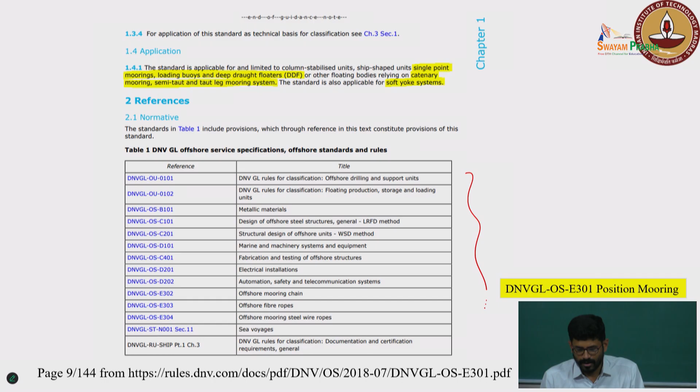This is about the mooring design, but it doesn't end there. When you start a design, you have to analyze, and you have to make changes to your design, so it's an iterative process. The different mooring analyses exist: quasi-static, frequency domain, time domain. This is what the industry practices.

Again, in this time domain we have the decoupled analysis and the coupled analysis. But before we get into time domain, it is important to understand the quasi-static analysis, because that is the very first step.

When you have a floating structure, you put your moorings in place. Quasi-static, the word itself clearly says it is not disturbed much. Your floating structure moves very slowly such that the line dynamics are not affected. Basically this point moves along with your floating body. If the floating structure is going to move, that point is also going to move along with it, so it will create some kind of a whipping action.

In reality it will create some kind of whipping action, but if your floating structure is not responding quickly to the environment and is going to move slowly, then a quasi-static analysis can be done. That is the very first step, and then you can go on to do the time domain analysis. The industry practice is the time domain analysis with the decoupled approach.

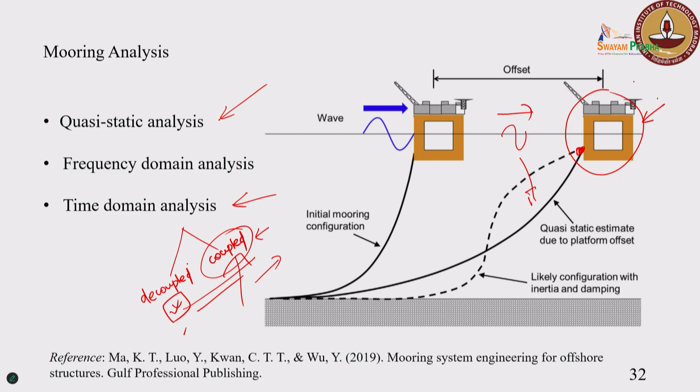Now the basic data input is that you need to know the type of floater you are going to deal with. In this particular case we have the WEC characteristics, the type, and dimensions. The floater motions will give the loading to the fairlead of your mooring line, and that is what is going to travel to your line. So this includes WEC characteristics and environmental loads: wind, wave, current, water depth, soil characteristics, and operational requirements.

Sometimes, as said, for your drilling operations you want to have very little excursion, because you go exactly to the site where your floater is, to that particular location. For example, if this is the site and this is the place where you want to drill, you take your semi-submersible exactly above the place where you want to create the well. Then you have a restriction on how much this floater can move around.

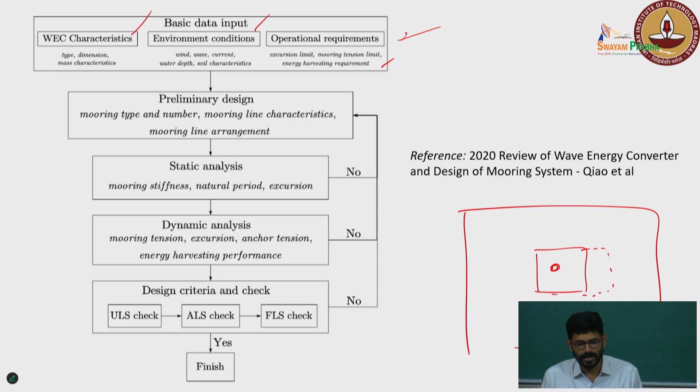So we have some constraints, and such constraints have to be taken into consideration. This includes the excursion limit, and then the preliminary design, basically selecting the mooring type and number, the mooring line characteristics, and the mooring line arrangement.

So how it has to be connected to your floating vessel and where it has to end. We start with the static analysis, then move on to the dynamic analysis, then the design criteria. This is not complete, so it's an iterative activity. If it satisfies the criteria, go to the next step, or else you change it. That's what we mean.

The static analysis is basically to have a good understanding of what the fairlead tension is without any loads or other things. You just have a floating structure, you connect your lines to the structure, and see what is happening around it.

Dynamic analysis is when you subject your floater to respond to the waves, and because of the response of the floater, how that response is transferred to your mooring line.

Then we move on to check the design, because all items have a limitation, like the breaking load limit. When you purchase something from a shop, you know not to apply more than a certain load or it will fail. The same applies to mooring lines. By doing all this analysis, we're trying to check whether it's within the limit, whether the item will sustain, whether it will be safe for the 20 to 25 year service life.

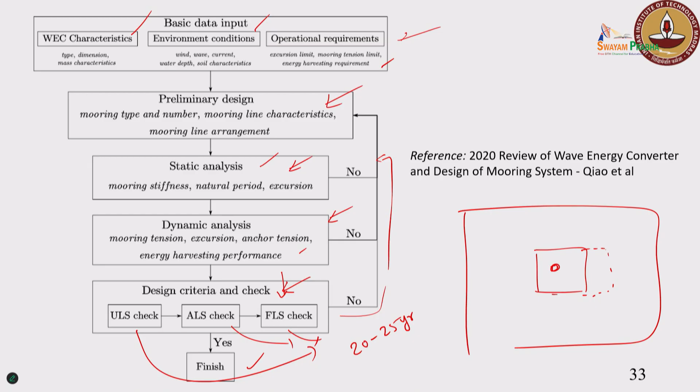Did they consider the temperature gradient from the water surface? No, they don't worry about that. These are all rugged structures - the chain, wire rope - the temperature gradient will not have any impact on the overall performance of the mooring.

Generally, how much does it cost? I'm not aware of the exact cost, but it's huge in numbers, especially for offshore mooring lines, because it has to withstand the corrosive environment. So it's not just normal steel, it's galvanized steel. All these things add up as an add-on to your existing items, so it becomes very costly.

Yes Prof, I could give you some numbers. Some literature said mooring costs 40% of wave energy converters. In 2019 I visited Hawaii, there's a wave energy test site, and some mooring had failed. They were in the process of repairing and rebuilding it. The water depth wasn't that deep, from 30 to 80 meters, I don't know which one failed, but it took them $2 million US dollars. So that gives you a sense of how much it costs.

Also, for something like an FPSO, is the amount spent on mooring worth it, since the FPSO itself is a huge cost and the mooring lines would be relatively less? It depends - for a point absorber, which is small, the mooring itself could be a much larger cost proportionally. It's similar to how for a courier, the product value may be very low but the courier cost itself is very high. The same way for many offshore items, the mooring cost can be around 50% or close to that of the overall cost.

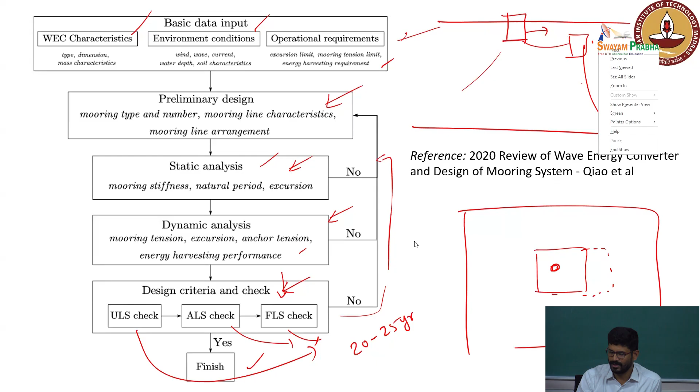So regarding direction, that's a very generic question. For a given site, first thing is you will get a rose diagram - you might have seen the rose diagram. What do you understand basically - in which direction, what is the most probable wave height and what is the occurrence of that, all those things you will get. So based on that, things will be aligned. So there is no direct straight answer, all these things are site dependent activities.

So you need to have extra data - meteorological data, which also includes these items. Based on that, they orient in such a way that it will take these considerations into account.

What is the general span of mooring, how much lifetime? Whenever you have this, that is why we have this fatigue limit state. So when we say fatigue, you carry out the fatigue analysis - basically, fatigue limit state means you are going to do a fatigue analysis.

One is, I am going to stretch it to the extent of what is the load that it will take to failure - that is extreme analysis. The other is fatigue analysis - basically you are going to apply cyclic loading for 20 years, or sometimes it's going to be very cyclic in nature.

For fatigue life of the subsea flexibles or something, the factor of safety has to be 10. Which means that if your service life is 20 to 25 years, minimum 250 years your fatigue life should turn out. When you carry out the analysis, if your fatigue life is more than 250 years, that is a pass. If it is less than that, you need to go again and change it. So you carry out the fatigue analysis primarily to find out what is the damage, and then coming back to the fatigue life only.

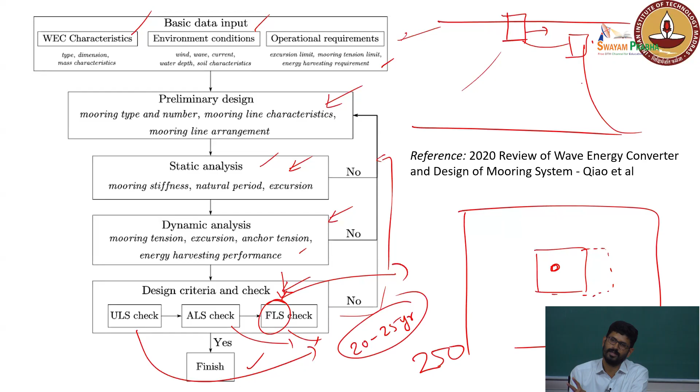Is there any specific diameter or something depending on the floater size, or how do you decide? That depends on the excursion only. Your watch circle basically says what is the excursion, how much it can happen. For example, in case of drilling, you don't want it to go beyond a particular distance, because that will have an impact on the drilling riser that you have. So there are no straight answers - it depends on depth, it varies for the floaters.

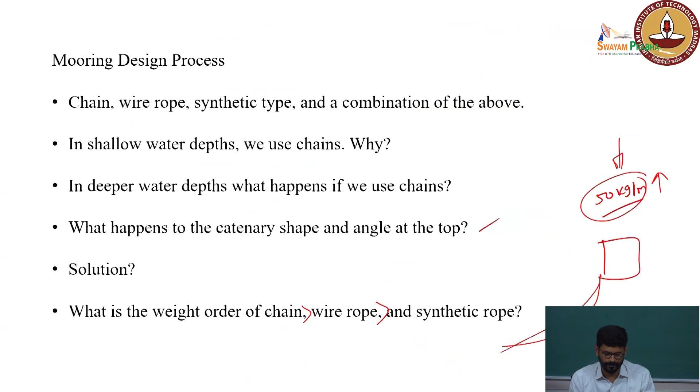The anchor circle will definitely vary, we saw that. So this is how it is - in case of shallow waters, the anchor radius to depth ratio will be a higher number, whereas in case of deeper water, it is equivalent to 1. So this is for your anchor circle.

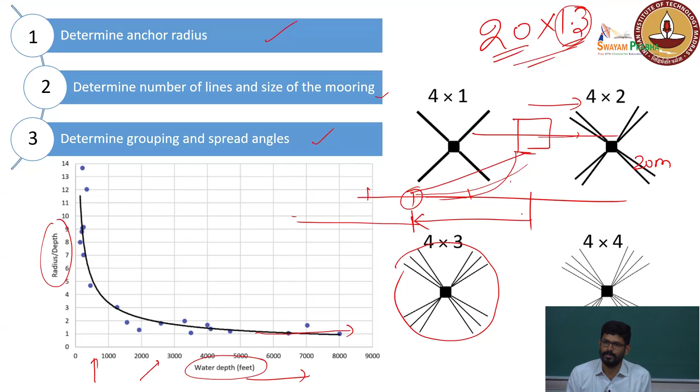For watch circle, you can tune it. For example, if I increase the pretension value, then your excursion will also get limited, correct? So all these things are a trade-off between the items. If your pretension increases, the line length on the seabed will come down, which means that on end B, the anchor point, there will be some loading coming up now.

If you have very few meters on the seabed, let's take 300 or 400 meters, then that load will not be transferred to the anchor. So it is always safe, because when your floater moves, that much chain has to be lifted up - that will act down and give the restoring force for your floater. When your floater excurses, it has to lift the mooring line, and since it is lifted, it is in suspension now. So the self weight will try to act down, and that will bring back your floater to the initial point.

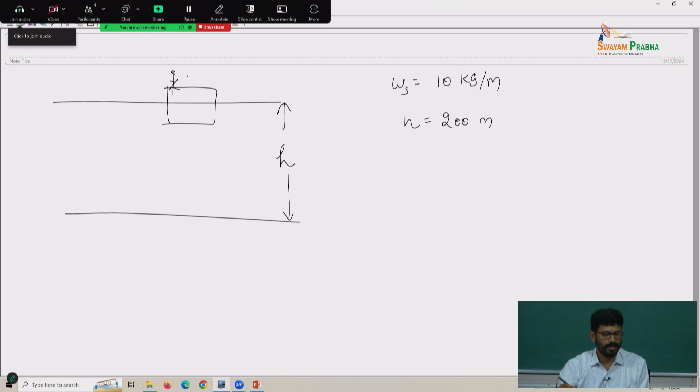A person is standing here, he is going to release the mooring line. He knows how much line he is leaving. Now let's take the total length as 300 meters. So water depth is 200 meters - it has to be, of course, more than that, right?

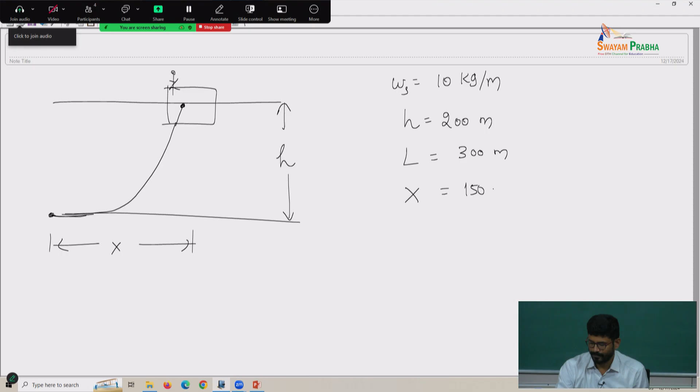So now you dropped your anchor somewhere here, then you have this connection all the way to the surface - let's take it somewhere here, the connection is on the sea surface itself. You know where exactly you dropped your anchor also - as a person who goes for installation, he knows I put an anchor here, I moved this much distance, so this distance also is known to me. Let's take this as x - let's take around 150 meters or 100 meters, so let's increase it to 350 for safety.

So now you know you have certain inputs. The question is how to get the proper or exact top tension, and if somebody wants to know what is the tension along the line, how to get it. As a simple thumb rule you can get it: basically 200 multiplied with some catenary factor into 10, in kg per meter, with length in meters. So you will get the tension at that particular point.

That's what we said. But if I want to trace this shape now, this is basically at some x comma y, so let us take x1, y1, and this is xn comma yn. If I want to trace this shape, how to get it?

You get the point. Some inputs are given to you, whether you will be able to trace the shape, that's a question. Now we need to have some equations, then only we will be able to get it. So now you have a physical problem with some inputs, and I want to convert it to a mathematical sense, but I actually don't know how to get it as of now.

So now to get it, let us try to take a very small element and try to do the force balance. That's what you did in fluid mechanics all the time. Whenever you want something, you take a very small element and you try to do all the force balances, try to come up with some expression.

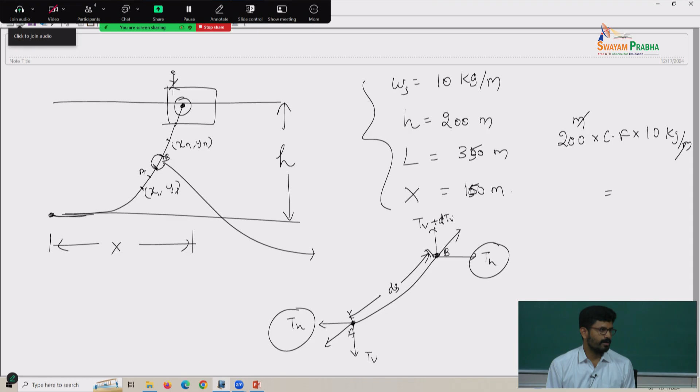So here the TH will be same as the TH. Why? The TH whatever you have here is equivalent to the TH here. Why? If there is a difference in the horizontal forces, horizontal tension, it will move away. So you are sitting in place, what are the environmental loads acting on the right side is equivalent to the left side, that is why you are staying in place.

The same way here also, so this TH will be same as this TH, whereas for this TV it will be TV plus dTV, because if you are just lifting a line, for example you start lifting it, whatever you see at the bottom versus at the top will be different - same procedure. Okay, so now for this small element there will be a load acting downward, correct or not?

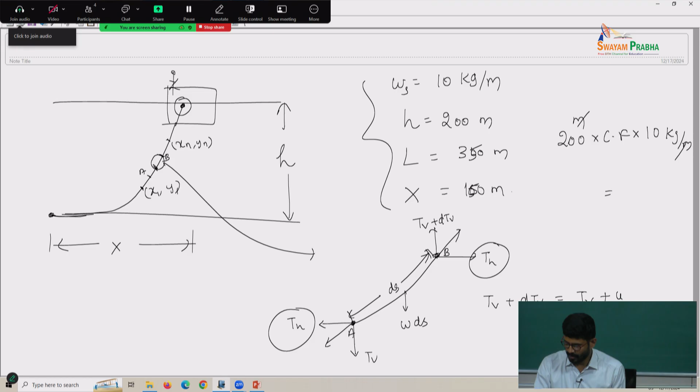We told it W, correct? So this will be multiplied with ds, that will be the net load acting downward. So W into ds. Now let us do the force balance for this. TV plus dTV equals TV plus W into ds, is that correct? That's the net vertical activity, correct?

So this TV will be gone, so dTV you are getting as W into ds. Now what else can we do? This is a very small element we said, correct? So let us take this as dy, this as dx. Let me write it down. So ds square, I can write it as dx square plus dy square for a very small element. Is that correct?

Again I will summarize: you have a floating body, a mooring line is connected, one end connected to the vessel, the other end connected to the seabed, and few meters on the seabed. This particular point is the touchdown point. I think we forgot to write it, so let us write touchdown point. So basically if you are going to lift it, this particular point is the touchdown point. After that few meters on the seabed. This is your fairlead, and this is your anchor point.

So now in order to solve this problem, since you have been given some inputs, we are trying to trace the catenary shape. To do that we need some equations. In order to get that, we have taken a very small element and tried to do the force balance. That is what we have been attempting all this time. So now since we have taken a very small element, we have taken...

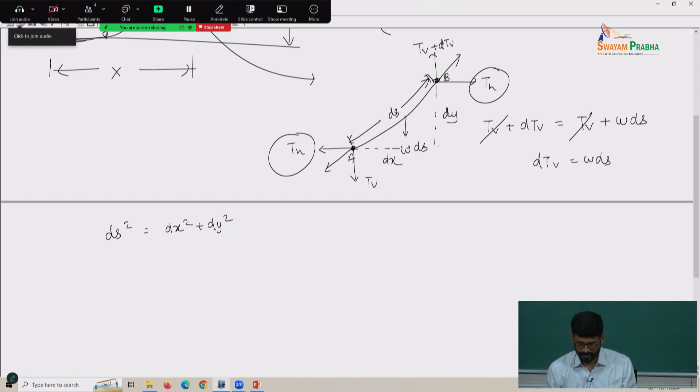So now can I write it this way? Because I need some expression, then only I can solve it. So I need some y as a function of x or something, which as of now I don't know. I am trying to do the force balance for a small element, to see if any rearrangement can be done. That is what we are attempting all the time.

So dy by dx whole square, I can write it like this, is it correct? We did nothing, just divide by dx square throughout. Okay, so at this particular point you have some theta, correct? This theta is equivalent to this theta also, correct? So now we can write tan theta equals dy by dx, which is also equivalent to Tv by Th. Is that correct? Tan theta equals dy by dx, tan theta equals Tv by Th, correct?

So now this dy by dx you can write as y dash, so Tv by Th. Okay, now we have some other item here: dTv equals w into ds. We need to bring in different items which are segregated, and try to combine them to get some expression. That is the idea. The whole idea is that you will have some equation y as a function of x which you don't know, and you are trying to find out based on a simple force balance for a small element, correct?

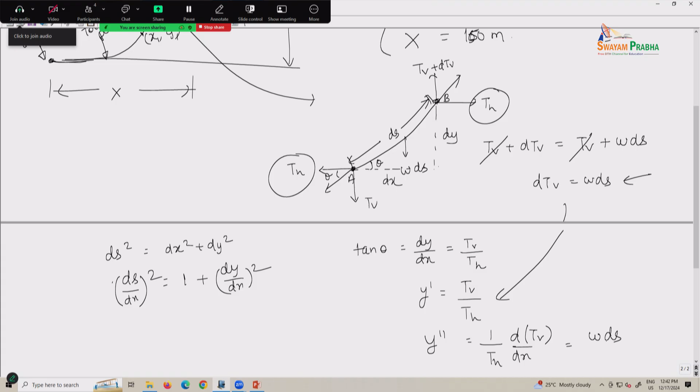Correct? So I can write it as dTv by dx. Now this dTv is equivalent to w into ds, correct? This dTv I am bringing it from here, by Th into dx. We did nothing, we have just taken a very small element, tried to do the force balance, tried to establish some relations, and tried to mix them up to get some expression. That is what we are attempting as of now, right?

Oh okay, sorry, I think it's moved away. Okay, fine.

Okay, let us write it again: w by Th into ds by dx equals y double dash. Now let us give some name for this Th, because Th is known to you, but...

w is known to you, Th is unknown. As of now you don't know Th, right? The horizontal force, you don't know what is actually happening. So Th is an unknown, whereas w is known to you, it is a known quantity.

So now let A equal to Th by w. Some understanding we are going to bring in, a new term, A equal to Th by w. So now this basically becomes y double dash equal to 1 by A, ds by dx. The same thing, no change. Th by w I have written as A and simply retained it.

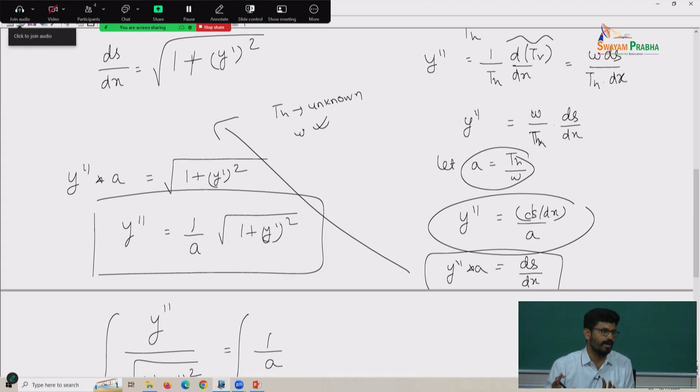See, you had a physical problem, you converted it to a mathematical sense, you had some headache solving multiple items coming up, then you tried to resolve it, ended up getting second order, now you are trying to break it down to y as a function of x, are we getting it or not? So now let us get back to the boundary condition. At this point, for ease, let us try to have the origin here at this location.

Let us have our origin here. So at this particular point, the touchdown point, x equal to 0, correct? Let us take small x, this is capital X, from here to the point it is the small x. At x equal to 0, y is also 0, correct?

See, not necessarily should you have the coordinate system there. Sir, why should I have my coordinate system there? It's always a question, correct? You are free to move around, but accordingly you should take your boundary condition values also, correct?

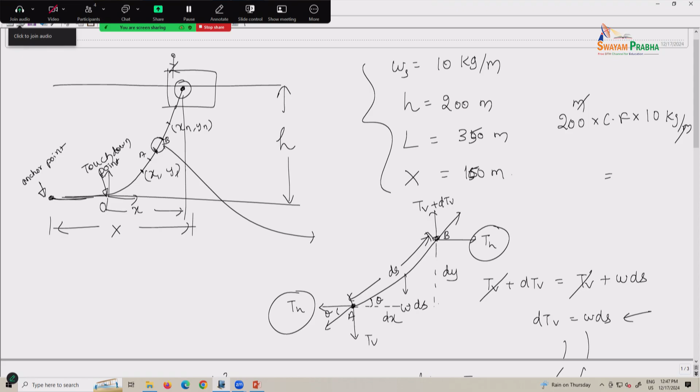This is easy for me because at the touchdown point my x is 0, y is 0, y dash, everything is 0, s is 0, everything is 0, correct? So now considering that at x equal to 0, y is 0, is that right sir?

So now let us write the expression y equal to sine hyperbolic of x by a plus c1, correct? Just the same thing written this way, that's all. Y dash, right? Now y only, okay. Hey, is this a y dash or y? Y dash, is it? Okay, this is y dash.

Okay, so when x equal to 0, y is also 0, so which will give us c1 equal to 0. Is that correct? So this will give me y dash equal to sine hyperbolic x by a. Is that correct, sir?

But then I am not interested in y dash, I am interested in the expression for y. So as for each value of x, what will be the value of y, right? So now what again we have to do? Again we have to integrate, right?

Again we will integrate. So if you integrate, you will end up getting y on the left side, on the right side sine hyperbolic integration gives cos hyperbolic x by a, by 1 by a, is it? Correct? By 1 by a plus some constant again, let us call it c2. So now this is the expression we are actually looking for, right?

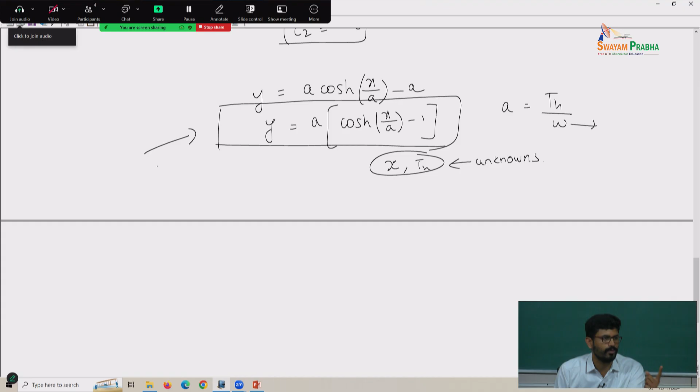So you need one more equation. As of now, you got only one equation. You need an additional equation to solve the problem, sir. You cannot solve it as such. Correct? See, the problem was very simple. You know how much line, what is the weight, everything. But then you are unable to say exactly how much length will be on the seabed, what will be the shape of it.

A simple problem turned out to be very complex as you started moving it. But then we started discussing for a discrete element, and ended up having some expression, but still it is not complete. As of now, the problem is not complete. You need to have an additional equation, that's what we are saying. So now let us see whether we are able to get some expression for S. So what is the expression for y dash we had?

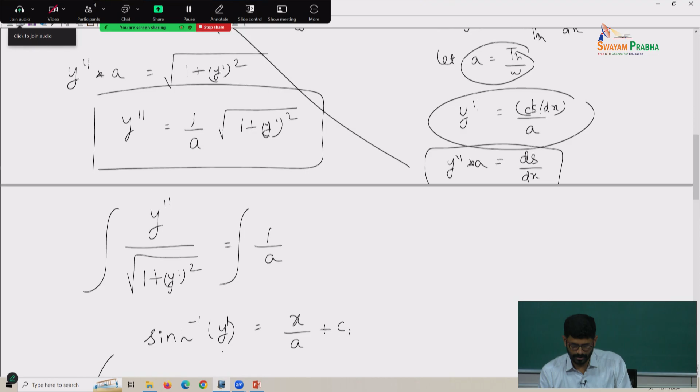For y dash, where is there? Y dash equal to sine hyperbolic, right? Okay.

So y dash, okay, so we have, I think we will write it at the bottom only. So now we are looking for some expression for S basically, because that is the length which is suspended, right? So again, to draw the figure, you have a floating structure, let us take some connection. So this length, I think I made, let us take it.

So from this point to this point is basically your S, the suspended length, right? What about the length on the seabed? Let us name it as S naught. So your total length is basically S naught plus S. Is that right? I can write like that, right?

From this point to where the fair lead connection is, that's what we call capital X, correct? So now, in order to solve this problem, you should know the value of TH, then only you can actually solve, right? But you know the value of L, because that is given. You know how much you have left in the sea. You actually know how much length is dropped in the sea, because some inputs are there for you.

So now we need to have some expression for S, right? So from which expression can we get that? From which expression can we get it? Expression for S.

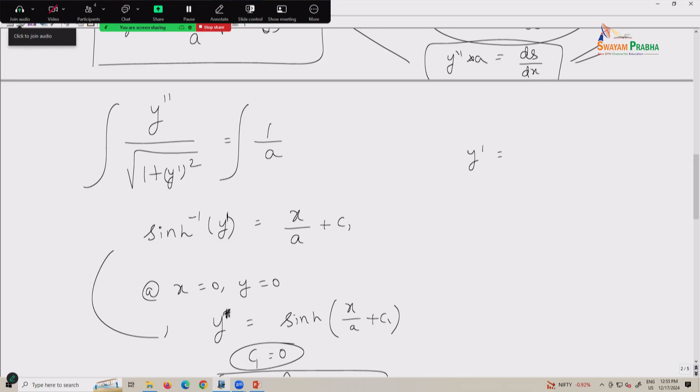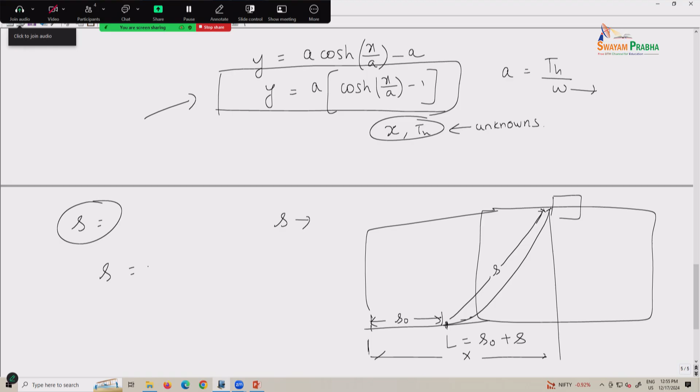How to get it? So if you actually take this expression wherein you have y double dash into a equal to ds by dx, if you integrate it, you will be getting some expression for S as well. So now if you plug the value of y, this expression of y, into that above equation, you will get the expression of s. So s basically ends up with—how to get it easily...

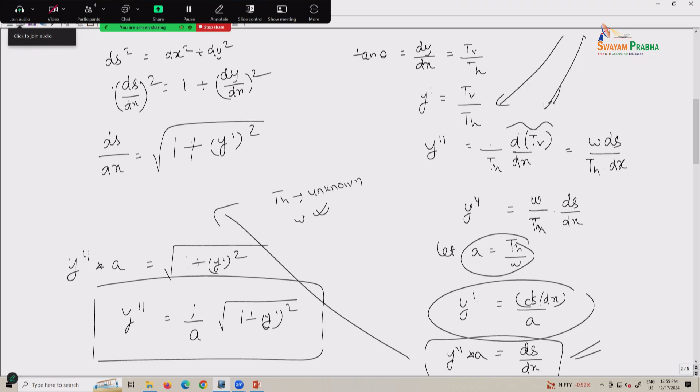y double dash into a equal to ds by dx, right? Okay, so I think I can plug in this y dash value also here, is that correct? So root of 1 plus y dash squared—what expression did you get? Sine hyperbolic x by a, right? So I can write sine hyperbolic x by a, squared, ds by dx. If I integrate this one, I will be getting the expression for s, is that correct?

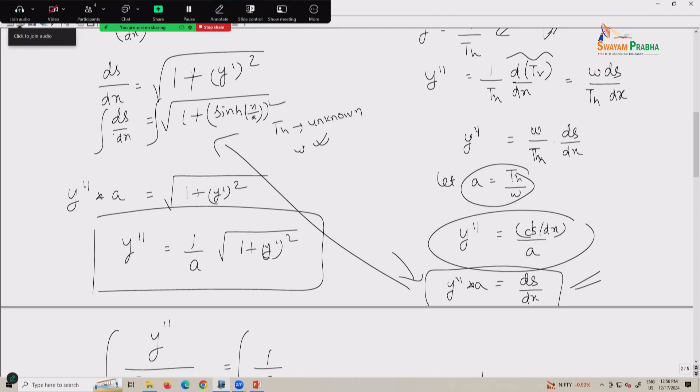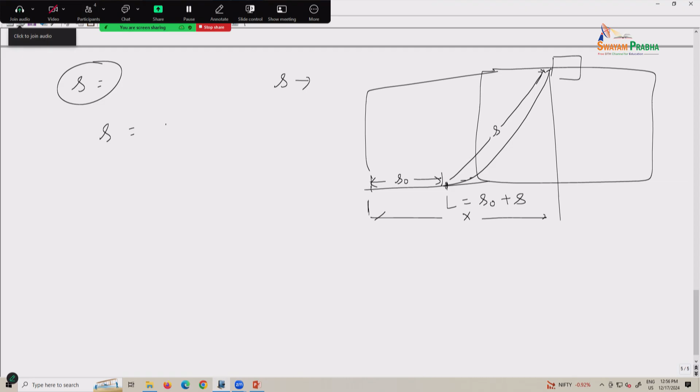So there are multiple ways in which you can get this, either you can do the double integration for y and use this expression, or use the other equation to get the expression for s. So finally you will have something of this form. What expression will you get? I think it is a sine hyperbolic x by a, something you will get. Please check whether you are getting this one. Please check.

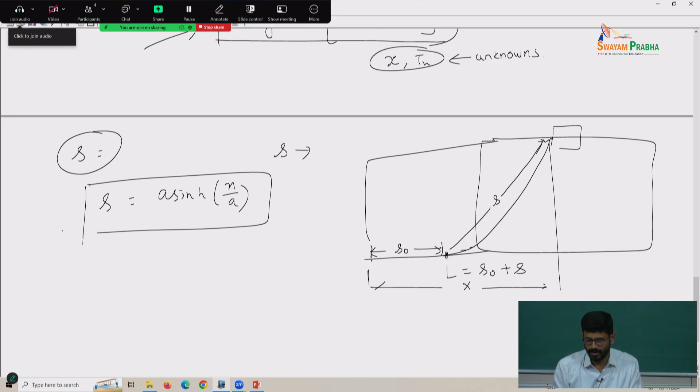Fine, you need additional expressions to solve the problem. That's what we're discussing. So finally you end up with an equation for s as well. Now you have one equation plus this additional equation, and these two have to be solved together. So a system of nonlinear algebraic equations turns up. You started with nothing, but finally you end up with a nonlinear algebraic equation. The problem is you cannot solve it straightforward; you need to adopt some Newton-Raphson method to solve it.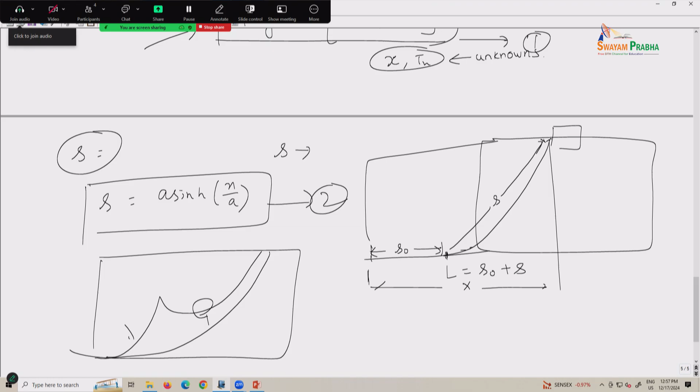An easy problem looks easy, but it's actually not easy when it comes to really solving a simple catenary for a single line. But if you have a mooring with some kind of buoy attached to a catenary line, the shape will change to something like this, and it becomes even more complex to solve. So you will have one catenary, a second catenary, a third catenary - three catenaries in total - so you will have a lot of unknowns, and accordingly you have to set up the equations to solve the problem. So it's not that easy as it looks.

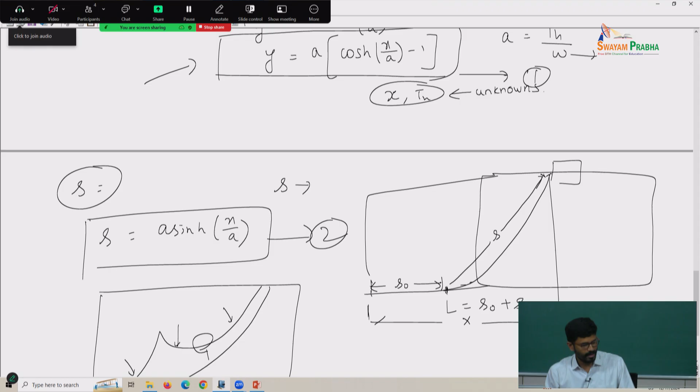When you use a tool, it's always nice to run through, but when you actually solve it yourself... okay, let's get back here. So this is what a simple MATLAB program is written for. Actually I don't want to get into this Newton-Raphson again, it will take another 45 minutes at least to run. If you're happy to sit, I'm happy to go, but you'll drain away. If anybody is interested, we can sit and continue. So finally I wrote a MATLAB code to check it out, and it ended up getting this outcome.

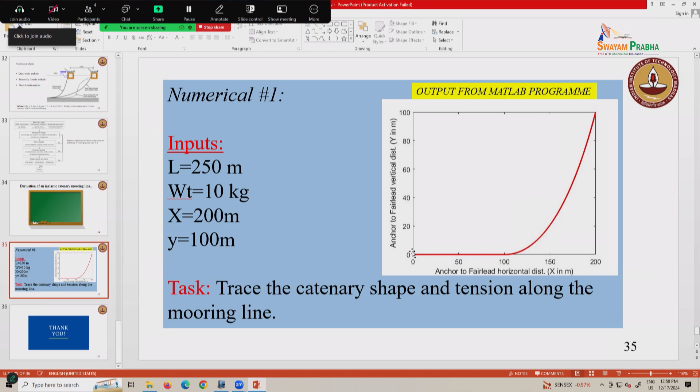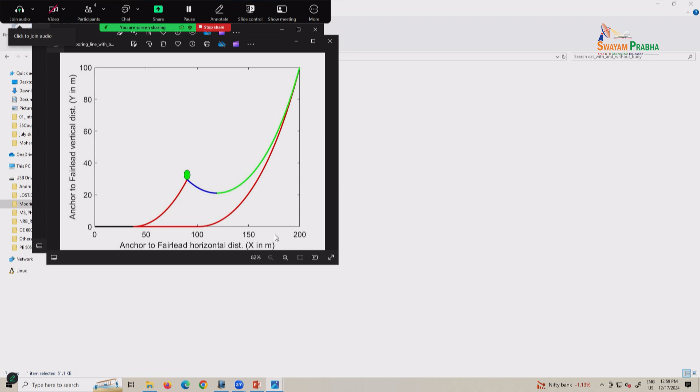So similarly for your moorings, again, mooring line with the buoy - this is with the buoy now. So in order to reduce the top tension, a buoy is added, and this is all without any environmental loads. You see the complexity - without any external environmental load, the problem is not that simple. But when you actually take the environmental loads into account also, how do you solve it? That's a question now. That will again become a big module. If you're able to solve that, then you've actually developed a tool, correct?

If you're able to get, as a function of time, the response of each of the different discrete elements - the stations - then you've actually solved the problem. So the complexity keeps mounting as you increase it from the simple to the complex, wherein as a function of time you want to incorporate the effect of the environmental loads also. This is very nice work that you can actually do for your PhDs also, wherein if you're able to develop your own tool, that is much preferred. People who write their own codes, it always goes a long way. So I strongly encourage that.

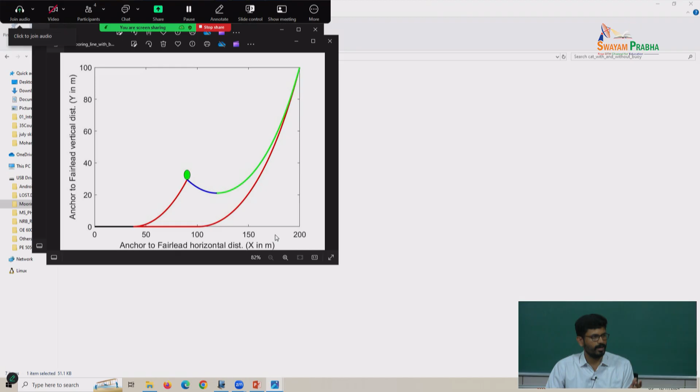I will stop here for this. If anybody is interested, maybe we can extend this and keep on going - it will go for hours. It will be nice also, but then you should also get involved in that - then it becomes good. Okay, I'll stop here. If any other questions are there, we can take them up.

If you're able to do the time domain analysis for this - as of now, we did not take the positions as moving. If that fairlead position is going to move, if I give some harmonic motion for that, then the response as a function of time, each time - these stations, as we call them - those things will also keep moving. Very nice analysis.

I also want to point out there is some software you can use. For example, NREL, they developed tools that can do static and dynamic analysis. And recently they also extended the work together with us to include vortex-induced vibration. There are also some commercial software that probably work better, like OrcaFlex - this software is very popular in the oil industry for mooring analysis. The software is pretty expensive, but they may give students some special license arrangement. So that's what I wanted to point out - you can use some tools for that. Thank you. These days we have a lot of sophisticated tools; you just think it will appear in front of you, but it will also create a lot of dummies basically, right?